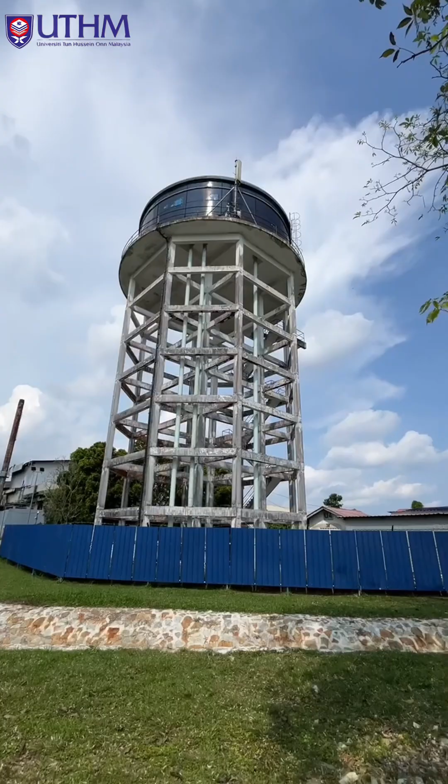Now, let's move on to chapter 2, which is our literature review. In this section, we look at the core ideas behind elevated water tanks. We want to understand how these structures behave and how they safely handle different forces.

What exactly is an elevated water tank? Simply put, it is a huge water container built high up in the air. It stores water at height so that gravity can naturally push the water down with enough pressure to reach everyone's pipe without relying entirely on pumps. Because a massive, heavy amount of water sits directly on top of a tall, thin support frame, ensuring its stability is incredibly important.

To make sure the tank stays safe, we have to identify all the loads or forces acting on it. There are 3 main types. First, the self-weight of the structure. This is the permanent heavy weight of the concrete walls, the base slab, and the column pushing straight down.

Second is the water weight. The massive amount of water inside pushes down on the floor, but it also pushes sideways against the tank walls. Third is the wind load. Because these tanks are built so high off the ground, winds can push against them from the side.

To make these forces easy to see and calculate, we use a tool called a free body diagram, or FBD. This is just a simplified drawing of our water tank that maps out every single push and pull acting on it. It helps us see exactly how the downward gravity loads and the sideways wind forces interact with the structure.

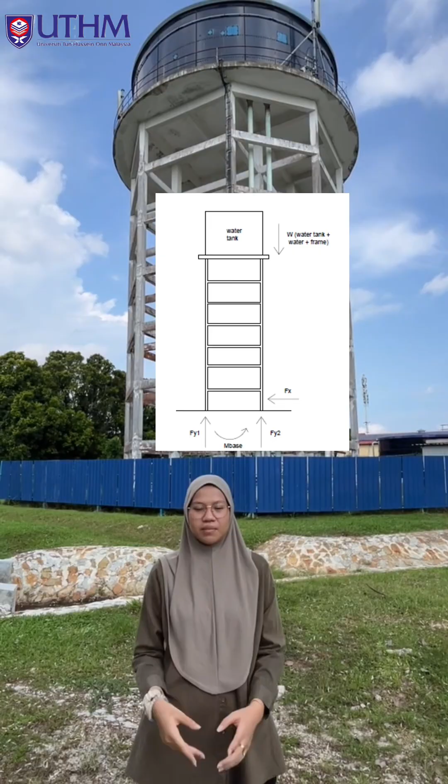Next, let's look at how the tank connects to the ground. We assume the columns are rigidly anchored into a heavy, deep foundation, which we call a fixed support. This fixed base locks the structure in place and keeps it stable in 3 ways.

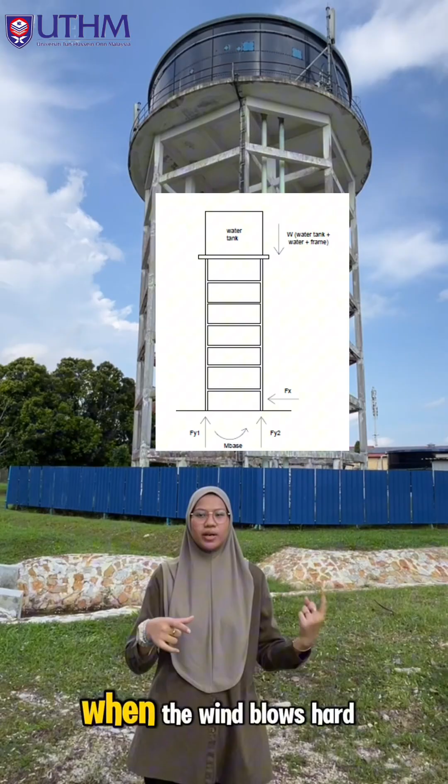First, it pushes straight up to stop the heavy tank from sinking into the dirt. Second, it fights back horizontally to stop the wind from sliding the tank sideways. Third, it acts like a tight clamp, twisting back to stop the entire tower from tilting over when the wind blows hard.

Finally, for the tank to stand completely still, everything must be perfectly balanced. This is called static equilibrium. The total upward push from the ground perfectly matches the total downward weight of the tank and water. The sideways grip of the foundation perfectly balances out the push of the wind.

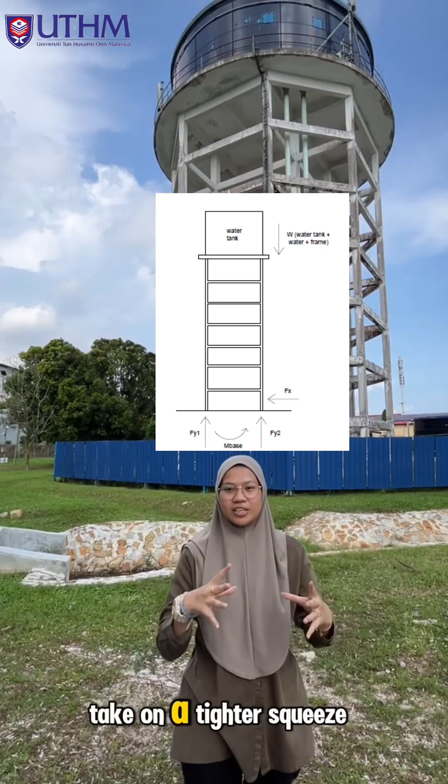When the wind blows from this side, it tries to tip the tank over. To stop this, the columns on the side facing away from the wind take on a tighter squeeze, while the columns facing the wind get a bit of relief. This smart distribution of weight keeps the entire system completely still, safe and stable.

Okay, for my part, I will explain the lateral water pressure acting on the wall of the elevated water tank. When water is stored inside the tank, it creates hydrostatic pressure that increases with depth. In this project, the water depth is 2.5 meters and the maximum pressure at the bottom is 24.53 kN per meter square, while the pressure at the surface is 0.

So, for the resultant lateral force acting on the wall, it is 30.66 kN per meter width, acting at 0.833 meters above the base. In conclusion, the tank wall must be designed to resist this pressure to ensure the safety and stability of the elevated water tank. Now, let's zoom in closely to the tank wall itself.

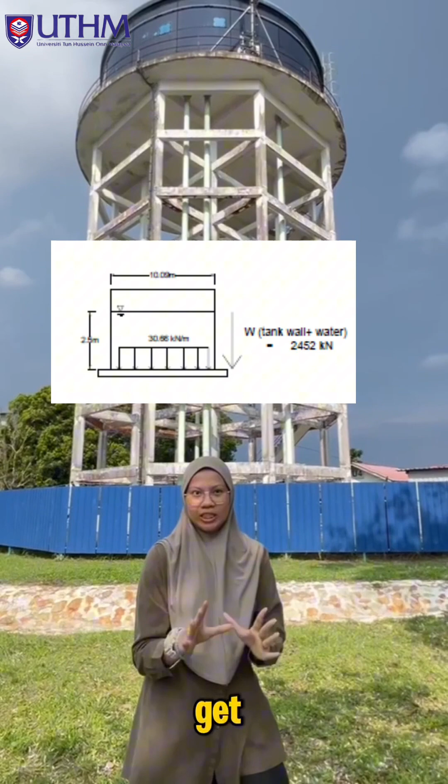By looking at its specific free body diagram, FBD, firstly, we can see the exact forces acting on this part of our 10-meter wide tank.

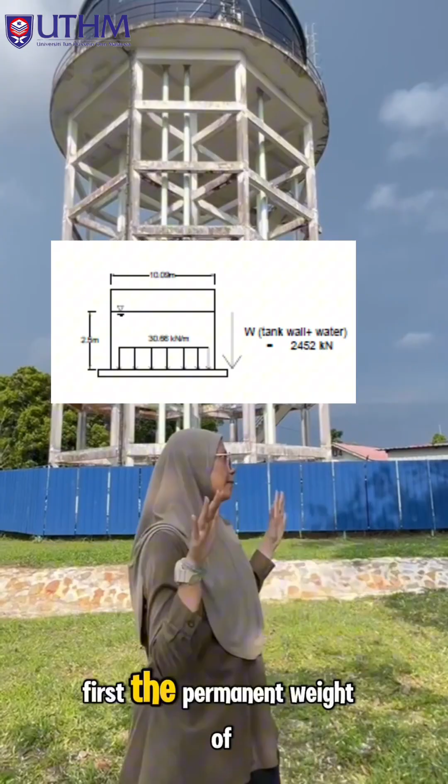First, there are two main forces pushing straight down because of gravity: the permanent weight of the concrete wall itself, which is 495 kilonewton, and the massive weight of the stored water, which pushes down with 1957 kilonewton. Together, that makes a total downward weight of 2452 kilonewton.

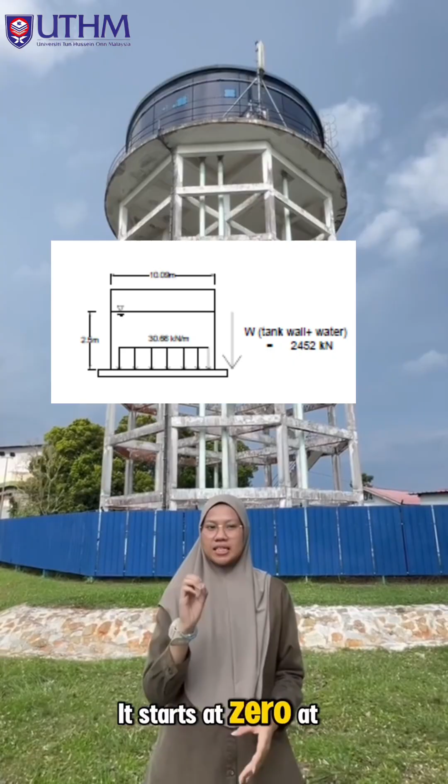Secondly, we have a horizontal force. The water inside pushes outward against the wall in a triangular shape. It starts at zero at the top of the surface and gets stronger the deeper it goes, reaching a maximum push of about 30.66 kilonewton per meter at the very bottom. This sideways push creates a heavy tilting effect on the wall.

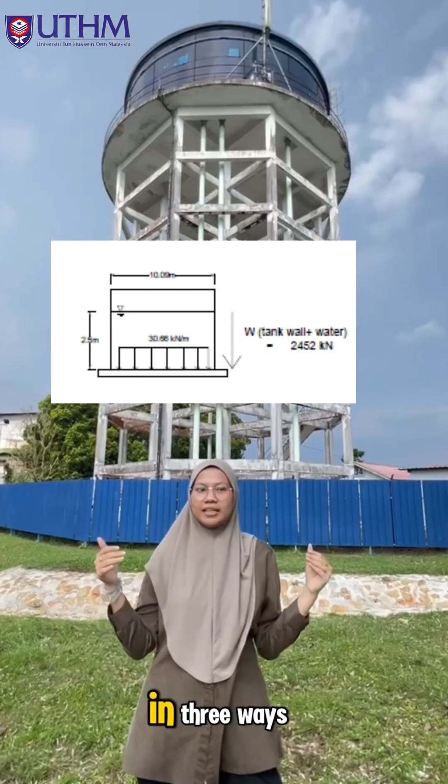To keep the wall perfectly safe and still, the bottom supports push back in three ways. It pushes straight up to hold up the heavy weight of the concrete and water. It also pushes inward to stop the water from shoving the wall outward. And it acts like a tight clamp, creating a resisting moment to stop the wall from tilting over. This perfect balance keeps our tank wall completely steady, upright, and safe.

This section presents the equilibrium analysis of the tank wall under hydrostatic pressure. The wall is assumed to act as a vertical cantilever fixed at the base. The hydrostatic force acting on the wall is 30.66 kilonewton per meter, which is balanced by an equal horizontal reaction force at the base to maintain equilibrium.

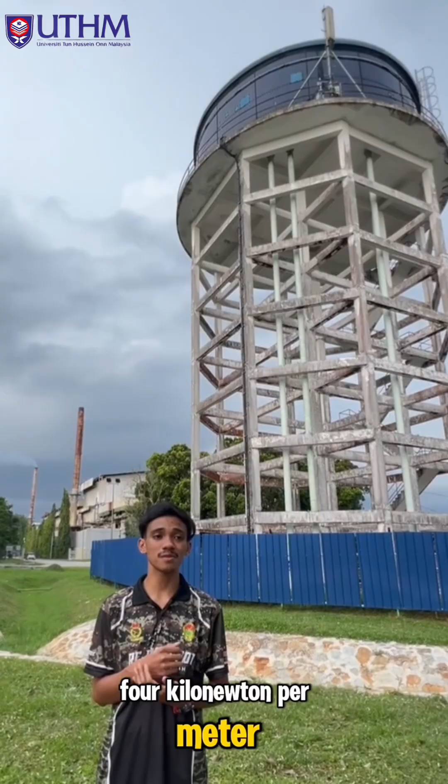The overturning moment caused by this force is calculated as 35.54 kilonewton per meter. Therefore, the wall is able to resist both the lateral force and the overturning moment, ensuring the structural stability of the water tank.

I am Nur Shakirin. For my part, I will explain the calculation of centroid for the wall section of the elevated water tank. In this project, the tank wall is assumed as a circular hollow section. This means we calculate the outer circle first and then subtract the inner circle because the middle part is empty and filled with water. The outer diameter of the tank is 10,090 millimeters, while the wall thickness is 250 millimeters.

So the inner diameter becomes 9,590 millimeters. To find the centroid, we use the formula x bar equals ax over total area, and y bar equals ay over total area. Since the wall has a uniform circular shape, the centroid is located exactly at the center of the circle.

Therefore, both x bar and y bar are half of the outer diameter. So 10,090 divided by 2 gives 5,045 millimeters. This means the centroid of the tank wall section is located at the center point, which is 5,045 millimeters from the x direction and 5,045 millimeters from the y direction. This centroid is important because it helps us understand where the center of gravity of the wall section is located, and it is also used for the next calculation, which is the moment of inertia.

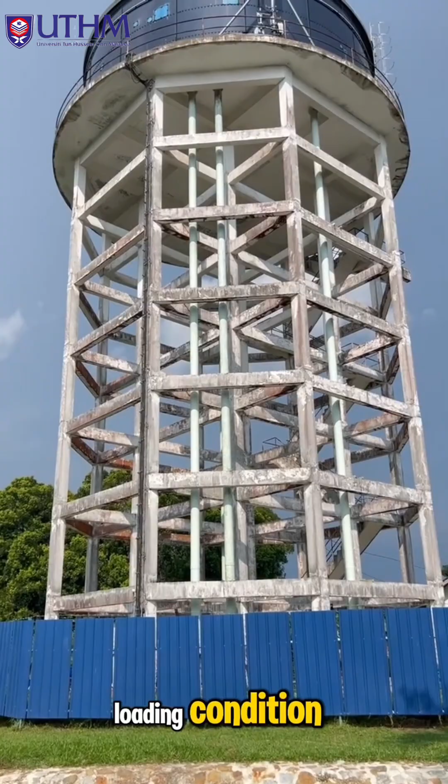In conclusion, this project successfully analysed the static behaviour of the elevated water tank by identifying the loads acting on the structure and applying equilibrium principles. The results show that the tank is stable under the assumed loading condition, with the stored water contributing the highest load. So overall, this project helped us understand how static concepts can be applied in real civil engineering structures.